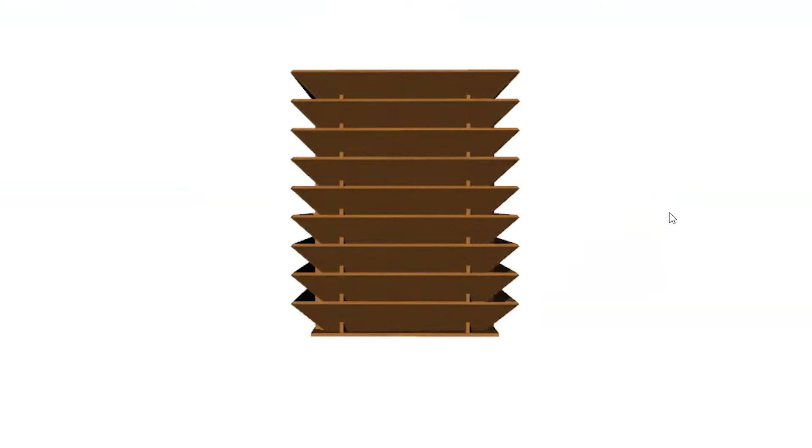In terms of the design of all of the pieces and how they'll come together to create this light fixture, let's start off with the base. At the bottom of the light fixture, you'll see this opening here. That's where the light bulb will be located, as well as the standard table lamp base that I have.

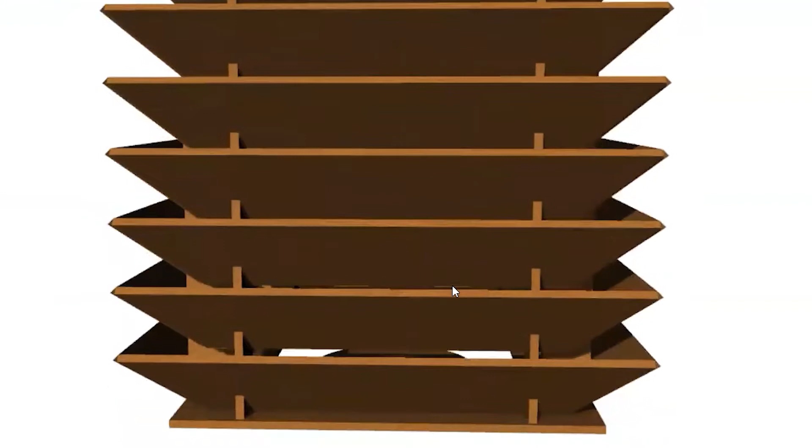As we start to go up the side, you'll see all of the pieces that essentially come together as a trapezoid with little finger joints here on the ends. These finger joints will slot into vertical pieces that look something like this in yellow. Each of the pieces will be finger jointed 1 inch apart from one another, all the way from the base to the top of this lamp.

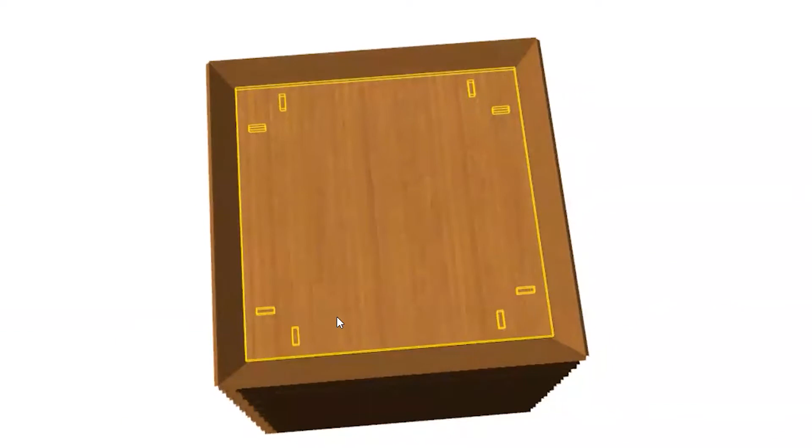At the very top, I decided not to have an opening because I wanted this lamp to glow. So the way that it works is the light bulb would be turned on and it would reflect off of the angles of all of the exterior pieces. When that happens, it'll hide the light bulb from direct view, but it'll create a nice glow around the light fixture itself.

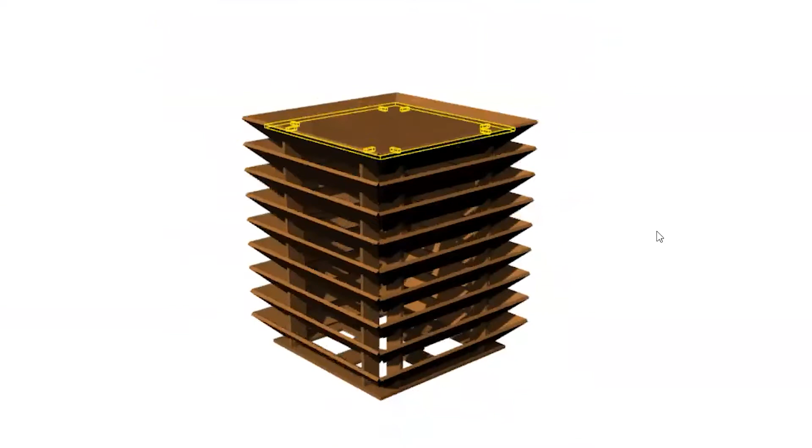Here you'll see all of the pieces that I was talking about in a 3D model. All of these trapezoids will be located on the exterior of the light fixture, and that'll create that nice glowing effect because it'll be installed at an angle.

All of the pieces that you see here will be the vertical posts that hold all of the exterior trapezoidal shaped pieces in place with friction fit finger joints.

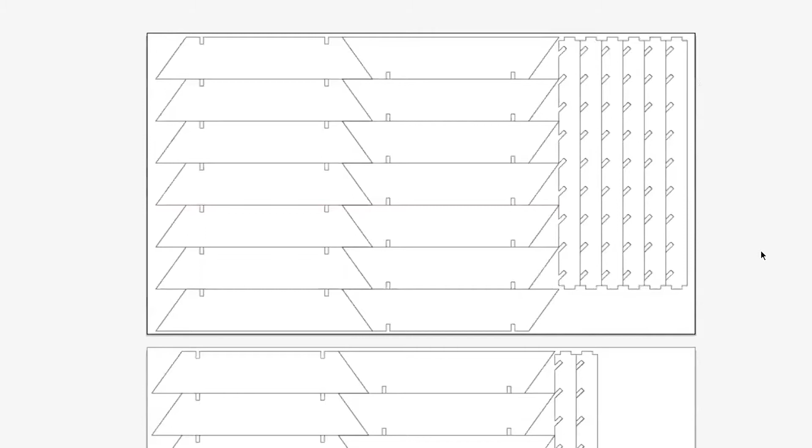Now the only other pieces that I'll need are the frames for this project. You'll see here that I have 2 different frames. The bottom here will be the base of the lamp that I was talking about with the light bulb at the center, and this piece here will be the top that caps off the entire light fixture.

So that's the design and the 3D model of the stacked pyramid light.

Before we get into laser cutting and assembling all of the pieces, I wanted to take a moment to tell you about a mistake that I made in the 3D model that came to light during the assembly process of this project. I'll also tell you a little bit about it during the time lapse so that you can see and understand a little bit more about what I encountered.

During the 3D modeling process, I didn't put the finger joints over each other and slot the pieces exactly where they needed to go. In fact, if the finger joints are something like this, I essentially just stopped at the very beginning and I didn't push the pieces all the way in the 3D model.

So what that did was it made me undersize the actual base and the top of this light fixture. When you see it in the time lapse, you'll see me start to struggle, and then I took a second to try and figure it out by taking a Dremel and cutting some of those openings so that I can make the finger joints work.

Everything else slotted together, but the areas that didn't work out were actually where the posts were located on the base and at the top of the fixture.